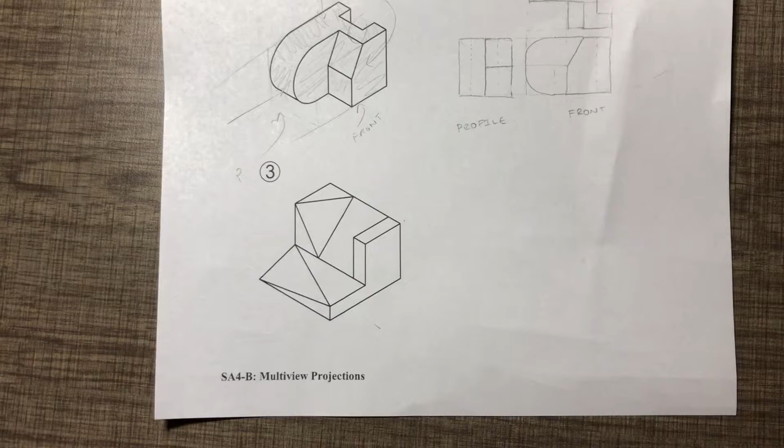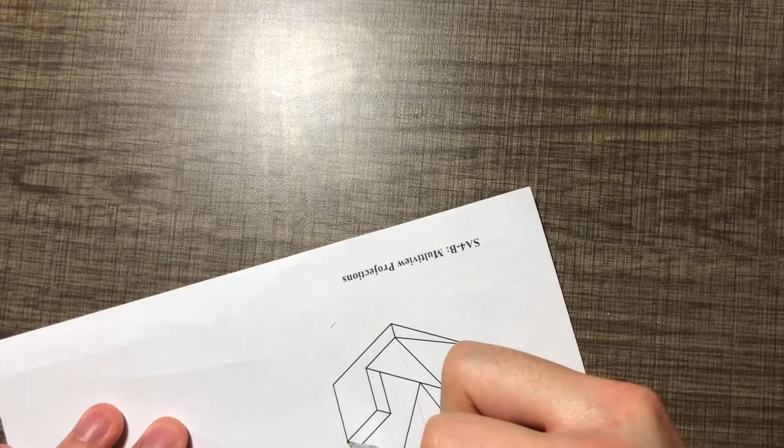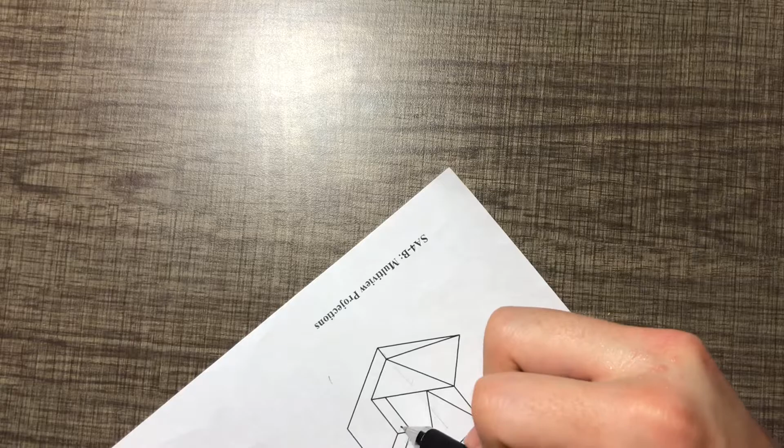Alright, now I've got this third one. It looks really scary, like some kind of abstract art, but we're just going to tackle this the same way that we did the other ones. Start with our bounding box. Project this one upward. Over. Oops, that's not quite good. There.

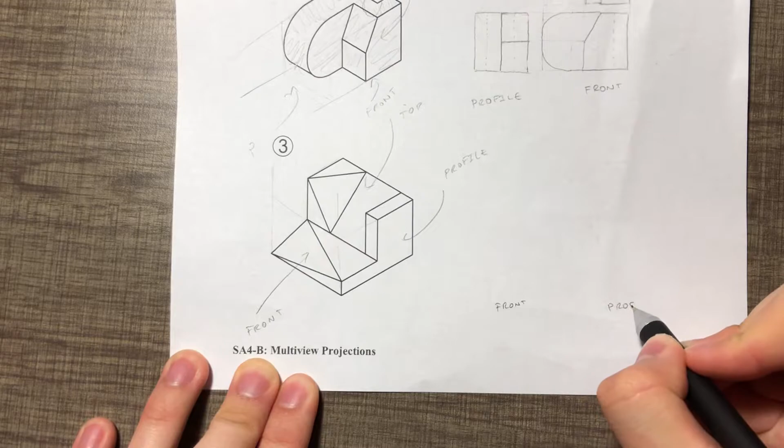So here's a bounding box around my object. Let's do this a little bit. Okay, what's front, what's top, what's profile? I think this one's front. Here's top. Here's profile. So similar to question 1, that's how we're going to orient it. Let's say front, profile, and then top up here.

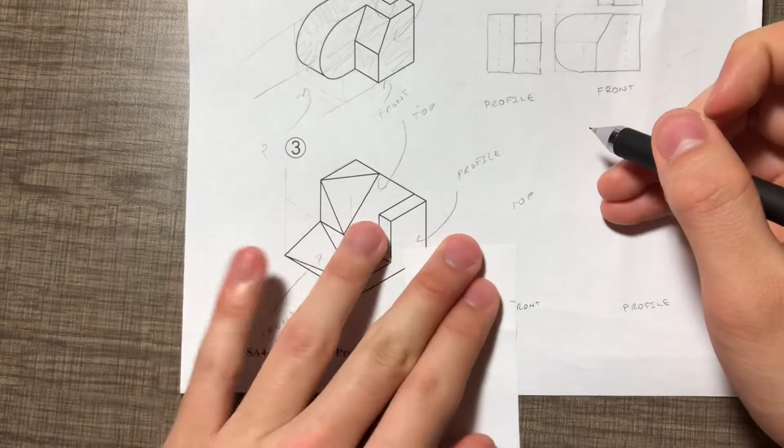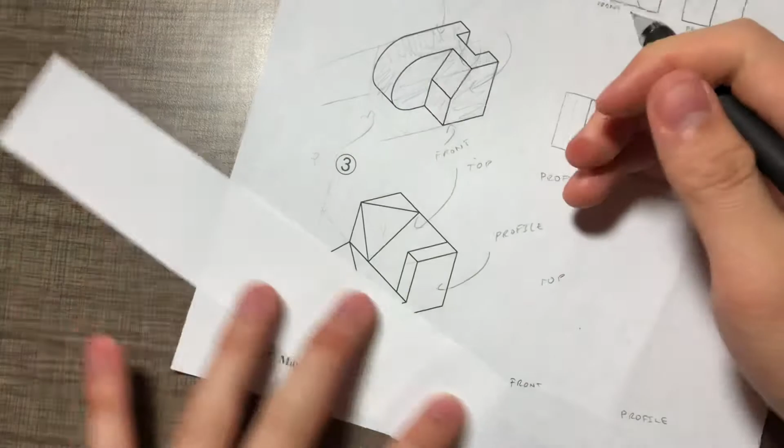We'll start by taking our dimensions. Our height of the front view is going to be this one. The width is going to be this dimension. Ooh, this is not a straight trammel. It's okay. I can deal with it. Front.

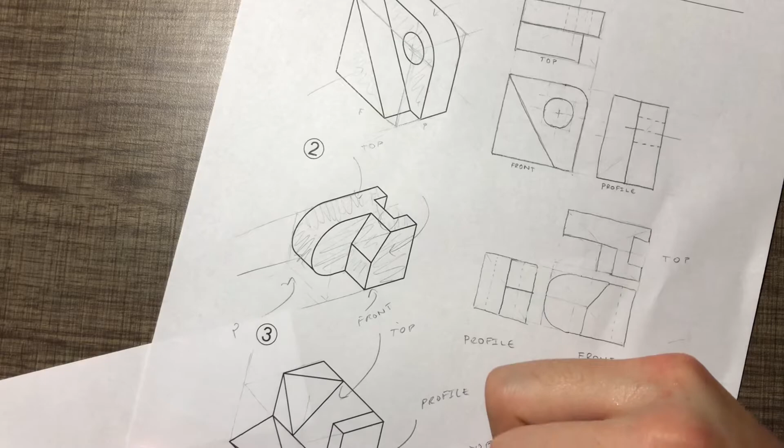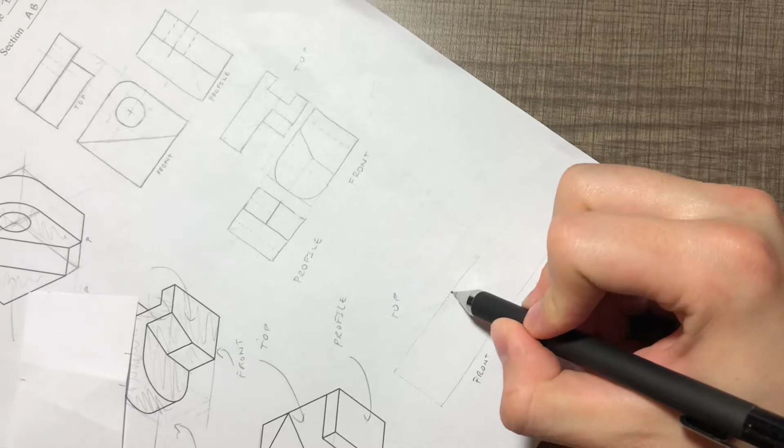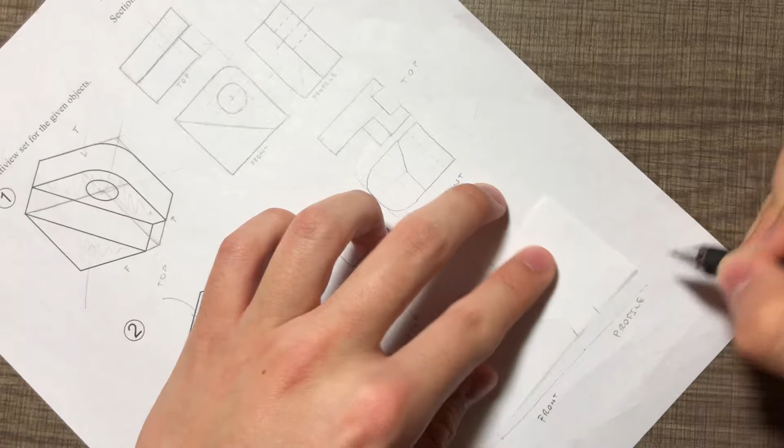All right, profile view. Just project these over. The height is the same. But the width, I mean, it's actually also the same. But this is something you're going to want to check most of the time. I'll move this word up a little bit. Okay.

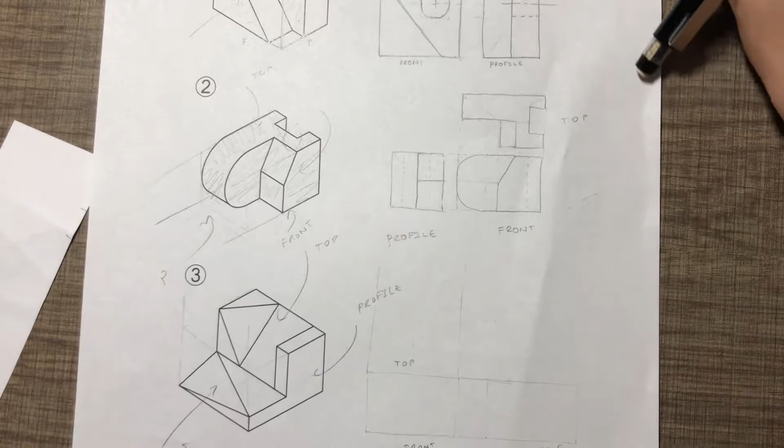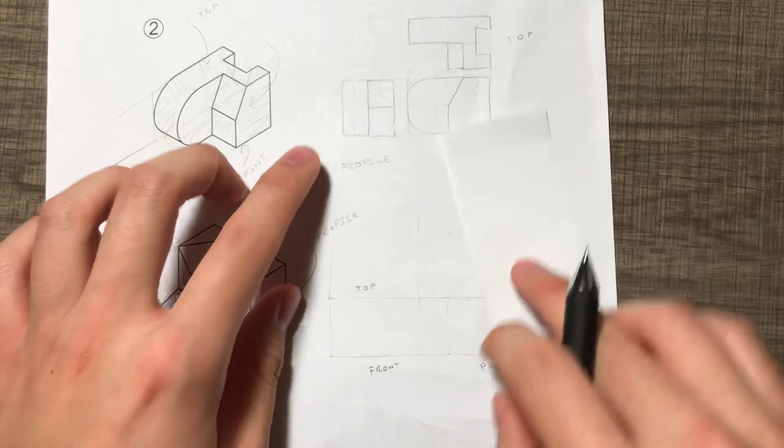Now in my top view, I'm actually going to take this one to be a square. I think it is. If I measure this distance, and then this distance, they are the same. So this width and the height are going to be the same. And this isn't really straight, and that's probably why it's giving me some issues. Erase.

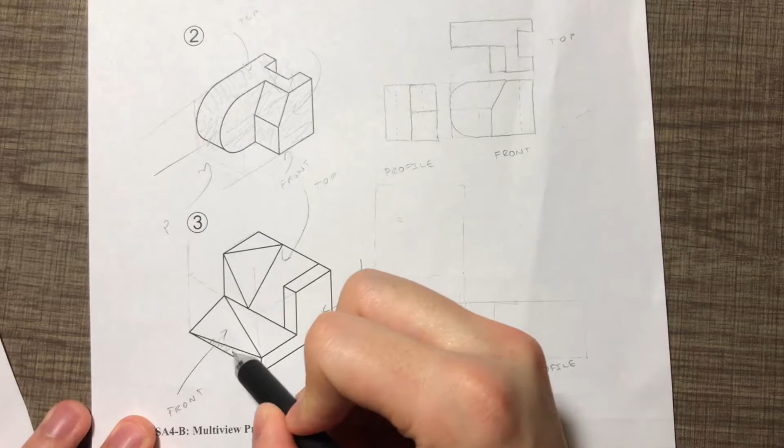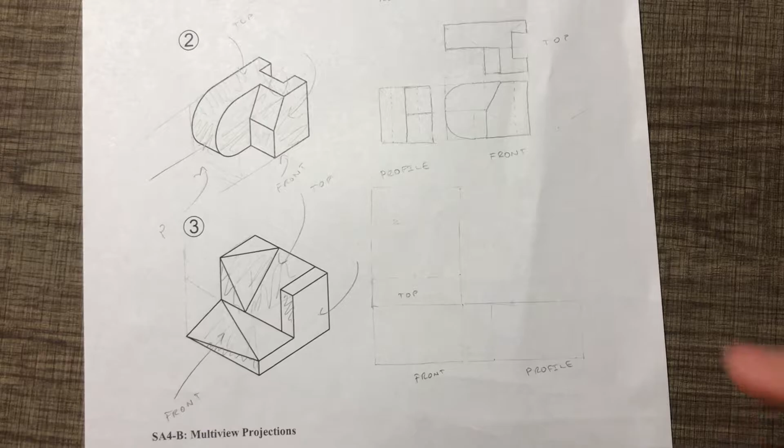All right, so let's start drawing features. In the front view, I'm going to be able to see this face, this face, this face. I'll see this ramp, but just as a box. And I'll also be able to see this, but just as a less interesting triangle than it is. Right now it's oblique. So let's start with what's easy. This triangle. Oh, I'm gonna see this too, but just part of it. Okay. Let's start with this guy. So, I've got this height. Oops, that could be straighter.

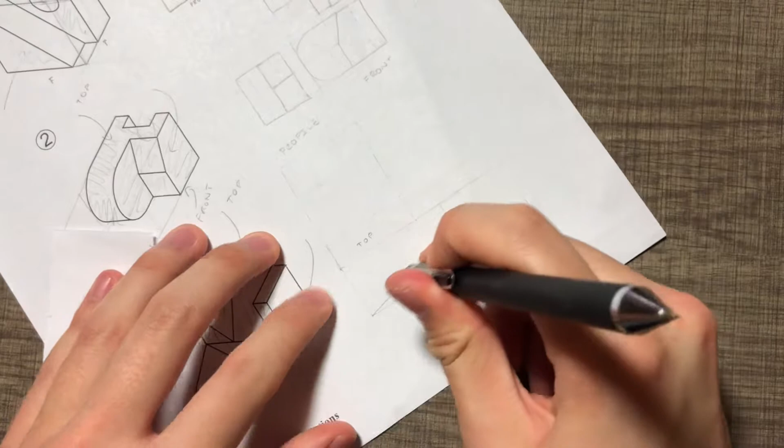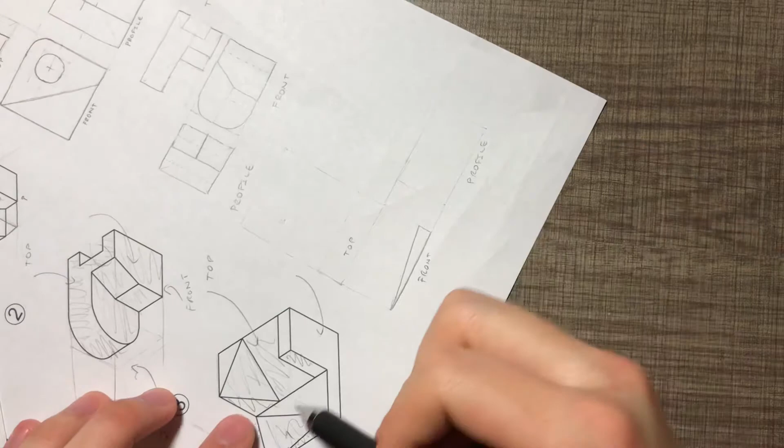Okay, what else? We'll do it one by one. This one. From the side, this is actually just going to look straight across. So if I project this one over, that's all I'm gonna see. So I've done this one, I've done this one. What's next? Let's do this one. From the top, it's coming over this distance.

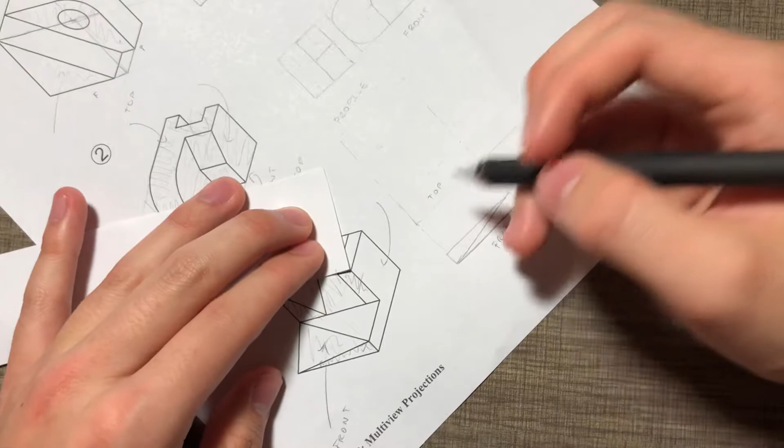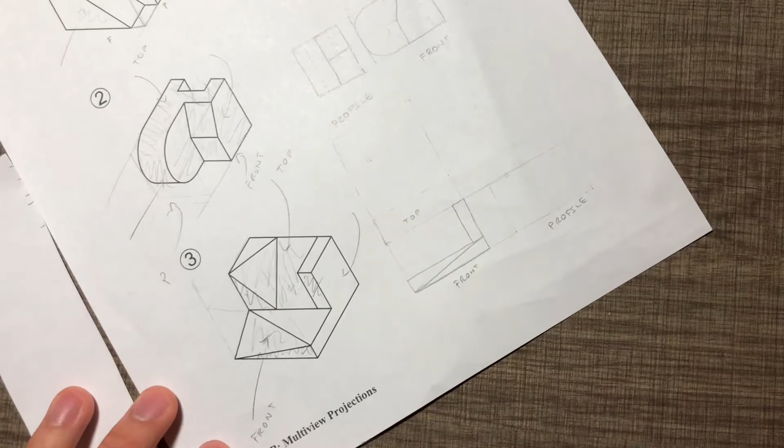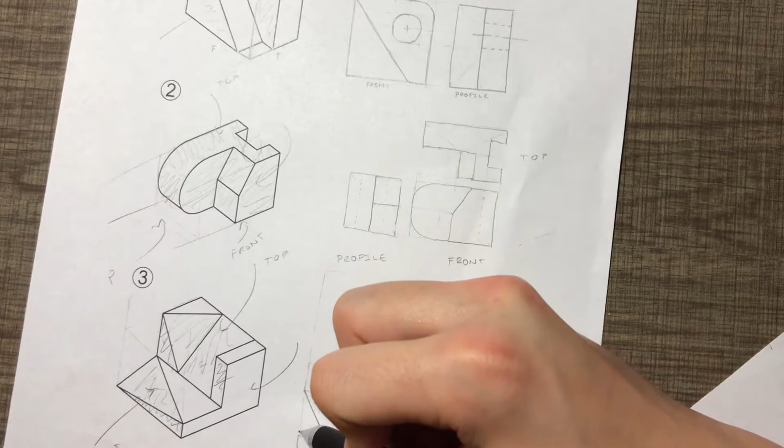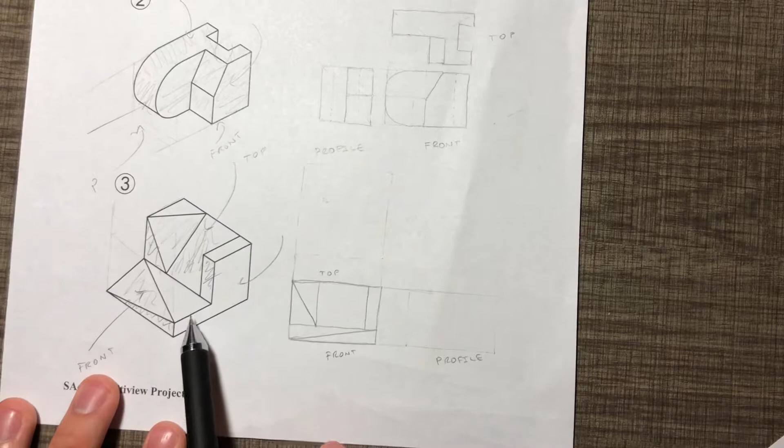Okay, what else? This thing? This thing? I'll do this plane first. I can take this dimension across because that's actually going to be the same. As long as it's on the same plane parallel, I can take that dimension. Okay, if I want to draw this one, I'm now done with my front view. It looks like a really complicated shape, but in fact, at least in the front view, I don't see any hidden lines. Okay, now let's try profile view.

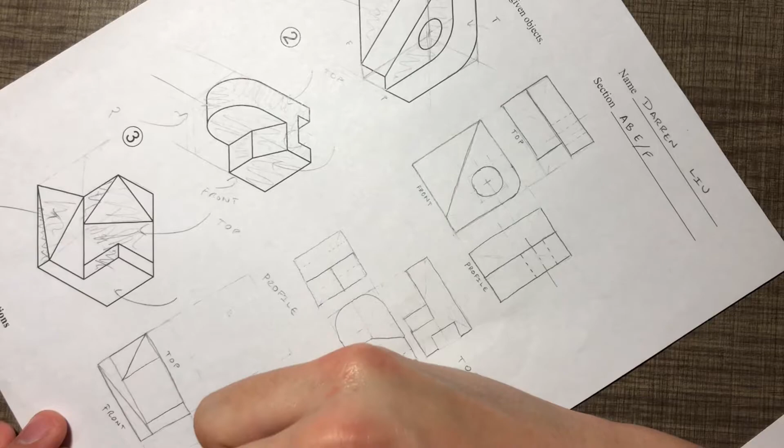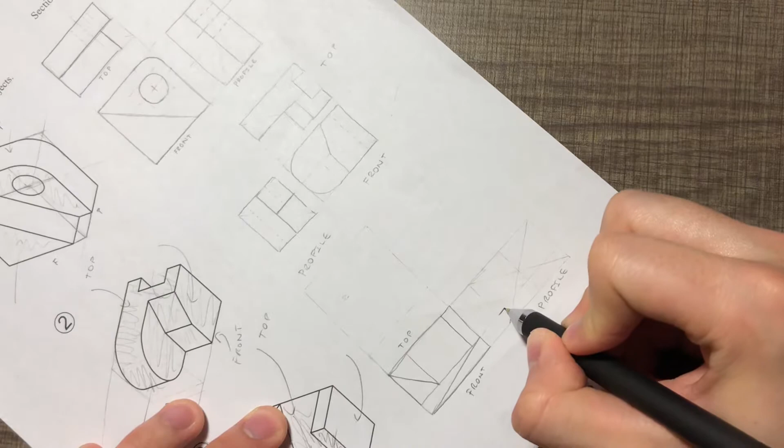Another thing, partitioned into halves. And then this feature just comes directly across. Okay. I can draw this one coming down. Just go bold on some of these right away.

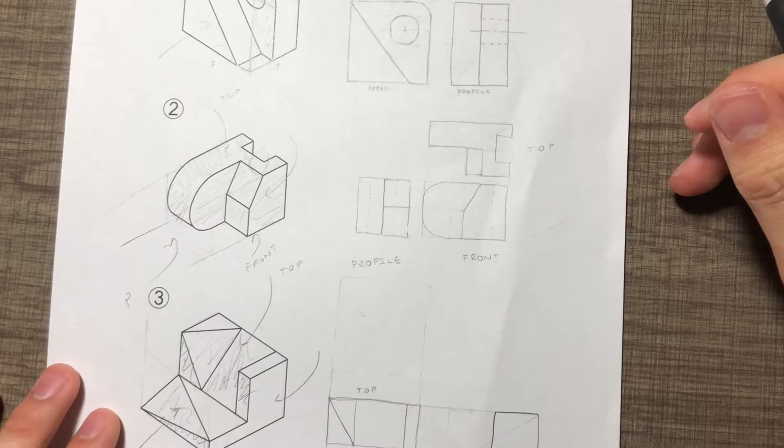Now, am I done? Not quite. I do need to show this angle coming down. So that's from this corner to this corner as a hidden line. As well as this one coming down. So that's another hidden line at a slightly different angle.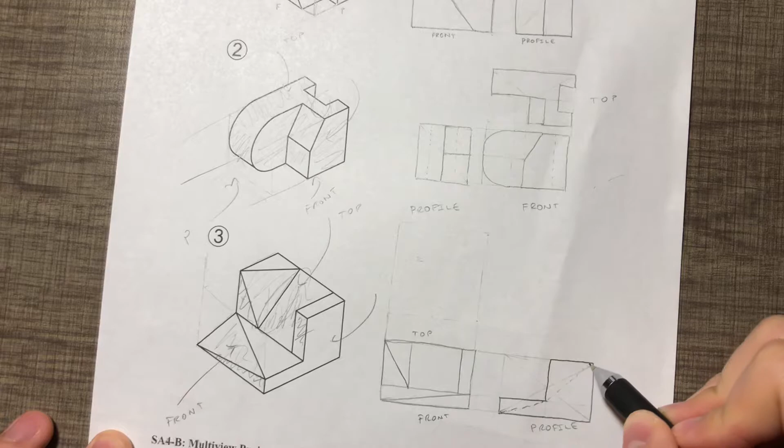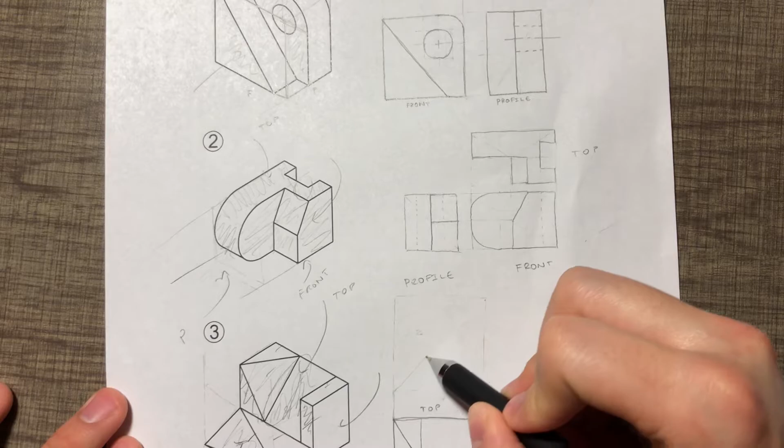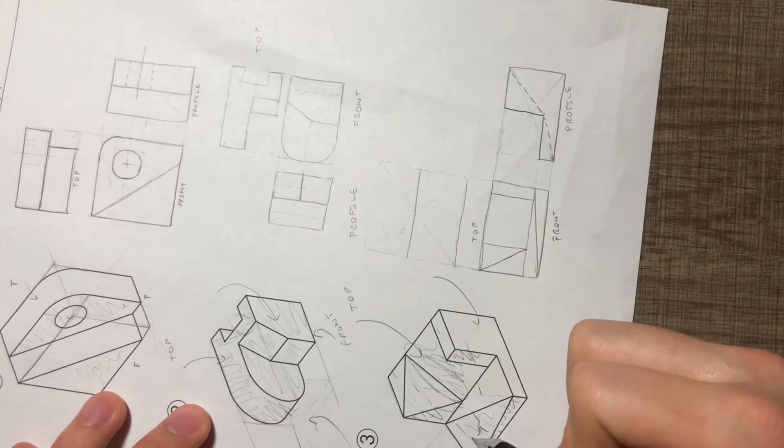All right, now all I have to do is draw the top view. So looking at this thing from the top, we'll just go face by face. I see this one, this one, this one, this one, this one, this one, and this one. And this one. Okay. Halfway across, partition. This feature over here is just a diagonal across these. All right, I can make this sharper. So I have this one and this one now.

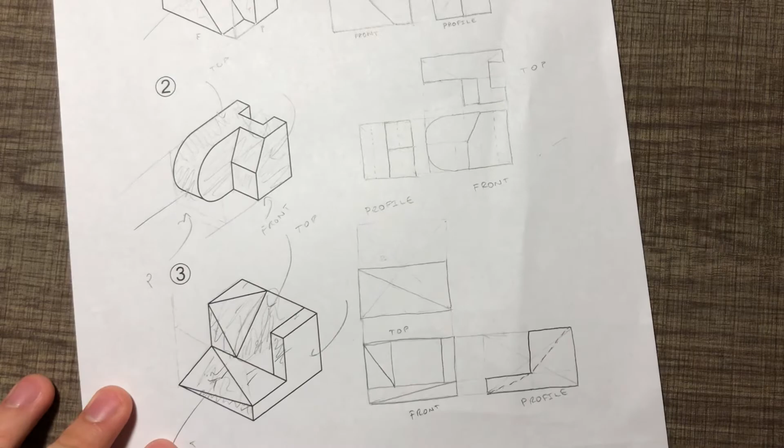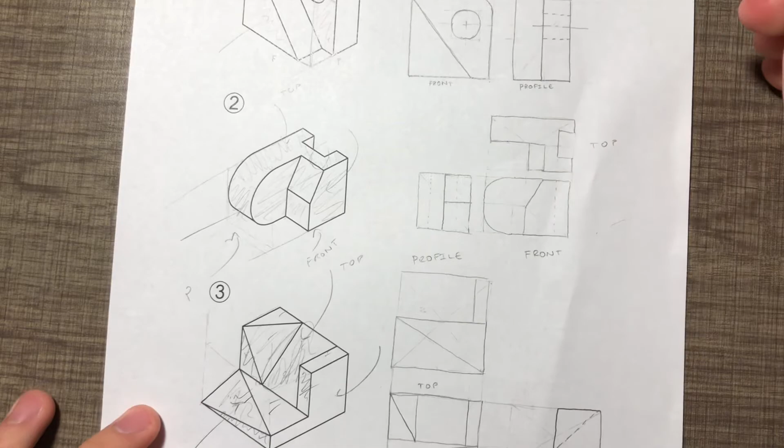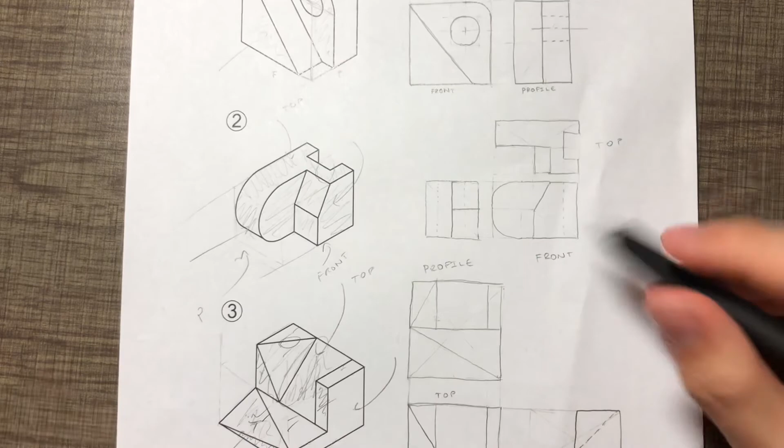Okay, now I need to get this feature over here. That's going to align. This one along the back. And finally, this feature is also going to align, right? Finally, I'll just show this one. And am I going to see any hidden lines? No. So even though this shape looks very complicated, if I'm turning this into a multi-view, it's not too bad. Now the hard part comes if I'm going from a multi-view back into the isometric, but we'll get into that a little bit later.